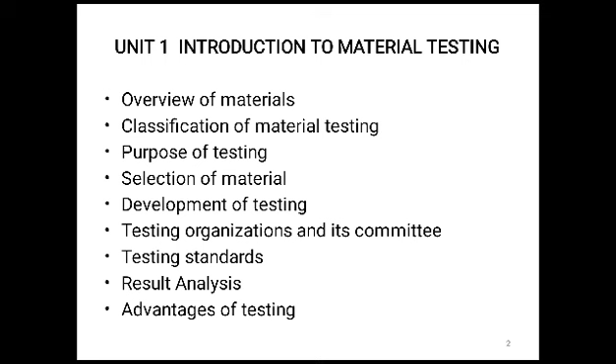In Unit 1, we are going to deal with the introduction of material testing. We'll be discussing the overview of materials, classification of material testing, purpose of testing, selection of material, development of testing, testing organization and its committee, testing standards, result analysis, and advantages of testing.

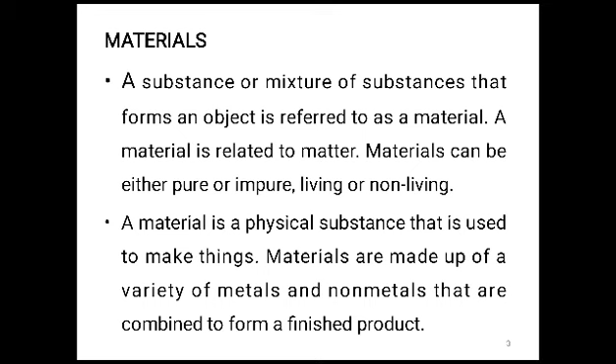Before knowing about material testing, we have to know what material is. A substance or mixture of substances that forms an object is referred to as a material. A material is closely related to matter. Materials can be either pure or impure, living or non-living. A material is a physical substance used to make things. Materials are made up of a variety of metals and non-metals that are combined to form finished products.

How are materials classified? Engineering materials can usually be classified into two categories: conventional materials and advanced materials. Metals and non-metals fall under conventional materials, whereas nano-engineering materials, smart materials, biomaterials, and semiconductors fall under advanced materials.

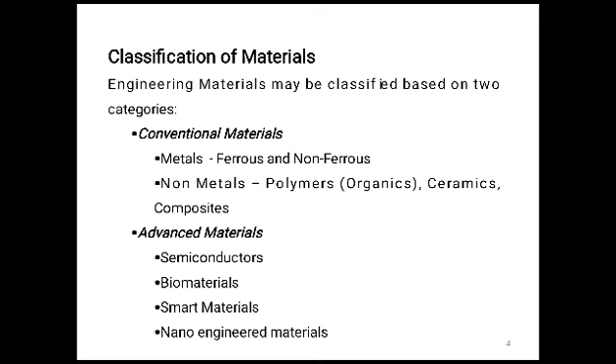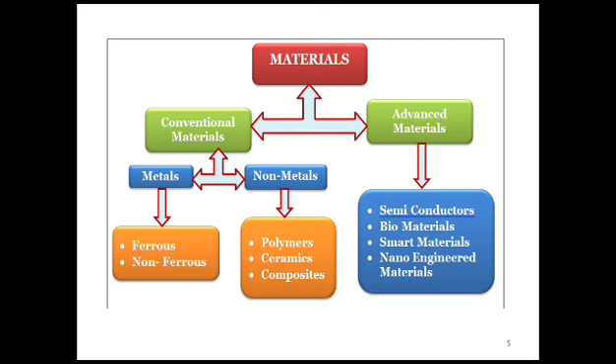This is the chart showing how materials are classified: conventional materials and advanced materials. Under conventional materials are metals and non-metals. Metals can be classified into ferrous and non-ferrous depending upon the iron content, and non-metals can be polymers, ceramics, composites, and natural fibers too. Under advanced materials are semiconductors, biomaterials, smart materials, and nano-engineered materials.

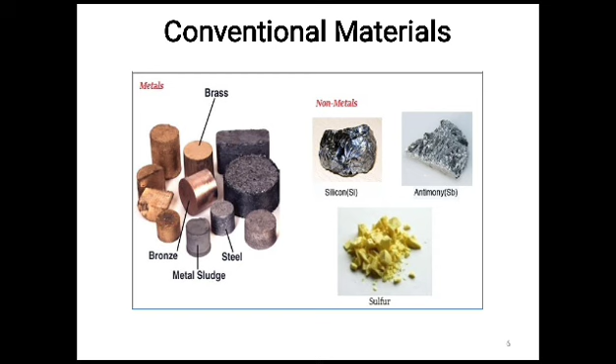Conventional materials can be ferrous or non-ferrous. Whatever material we use in day-to-day life comes under conventional materials, like aluminium, magnesium, beryllium, titanium, cobalt, copper. These fall under conventional materials, generally classified as ferrous and non-ferrous. They can also be classified into light metals, superalloys, and other conventional materials. Whereas non-metals can be classified into plastics, composites, and ceramics.

Metals are made up of elements that readily give up electrons in order to form a metallic bond and provide electrical conductivity. Metals are lustrous, opaque elements that conduct heat and electricity well. Most metals are malleable and ductile, and they are denser than other elements. In today's world, metals play an important role in many industrial applications as well as human daily life. Hundreds of metals are used to manufacture an object or product in engineering applications.

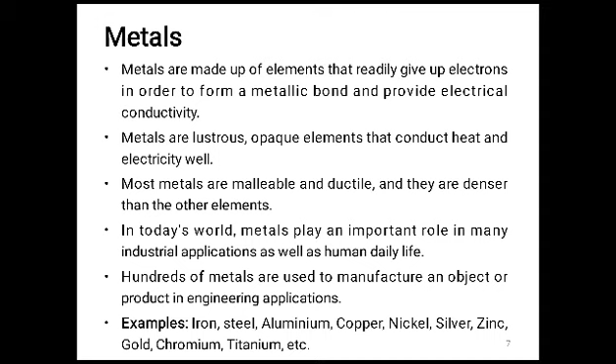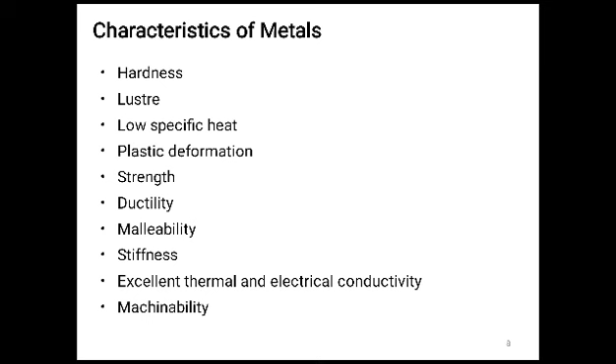Generally, examples are iron, steel, aluminium, copper, nickel, silver, zinc, gold, chromium, titanium, etc. Characteristics of metals include hardness, luster, low specific heat, plastic deformation, strength, ductility, malleability, stiffness, excellent thermal and electrical conductivity, and machinability. These metals can be classified into ferrous metals and non-ferrous metals.

Ferrous metals: if the iron content is high, it is called ferrous metal. Examples include pig iron, wrought iron, grey cast iron, malleable cast iron, white cast iron, steels, and the different types of steels also fall under ferrous metals.

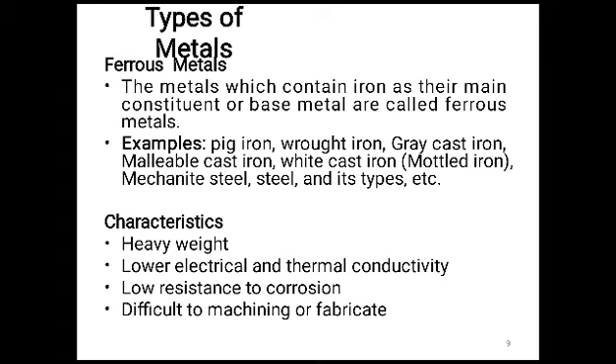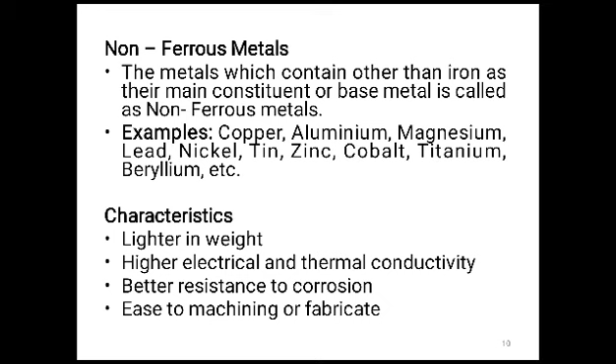Ferrous metals are heavy in weight, have lower electrical and thermal conductivity, low resistance to corrosion, and are difficult to machine or fabricate. Whereas non-ferrous metals contain elements other than iron as their main constituent. Examples: copper, aluminium, magnesium, lead, nickel, tin, zinc, cobalt, titanium, beryllium, etc. They are lighter in weight, have high electrical and thermal conductivity, better resistance to corrosion, and ease of machining or fabrication.

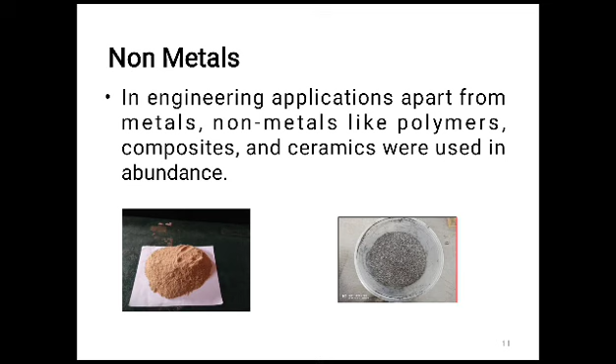Non-metals: in engineering applications, apart from metals, non-metals like polymers, composites, and ceramics are used in abundance. Polymers are composed of a large number of repeating units of small molecules called monomers. Natural and synthetic polymers are the two types of polymers used in various industrial applications. Examples include polyesters.

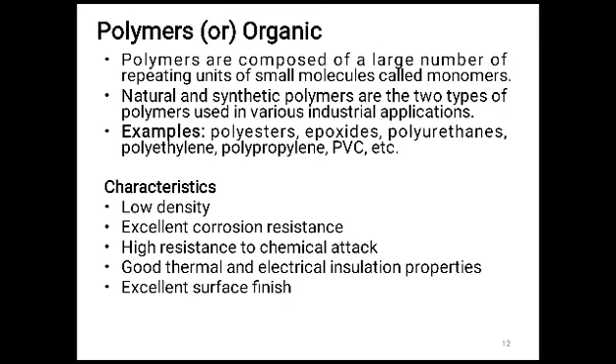Polyurethanes, epoxides, polyethylene, polypropylene, PVCs, etc. They have low density, excellent corrosion resistance, high resistance to chemical attack, good thermal and electrical insulation properties, and excellent surface finish.

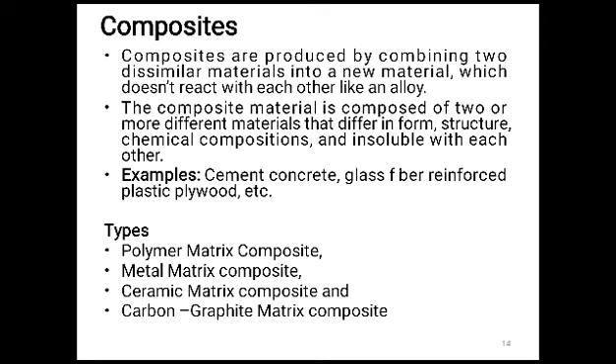Composites are produced by combining two dissimilar materials into a new material which does not react with each other, like an alloy. The composite material is composed of two or more different materials that differ in form, structure, and chemical composition, and are insoluble with each other. Examples: cement, concrete, glass fiber reinforced plastic, plywood, etc. These composites are classified as polymer matrix composites, metal matrix composites, ceramic matrix composites, and carbon graphite matrix composites. Thank you.